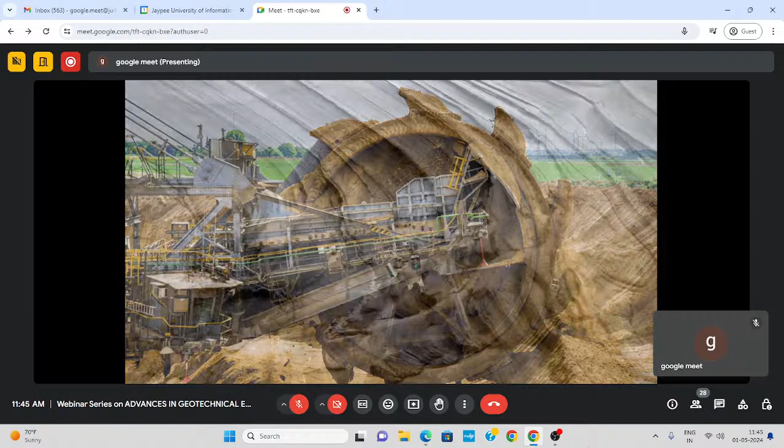The name Indian Geotechnical Society was adopted in 1970. The vision of the founding president, Mr. Khosla, and the honorary secretary, Dr. N.D. Gulati, was to build the society to promote cooperation amongst engineers and scientists for the advancement and dissemination of knowledge in the fields of soil mechanics, foundation engineering, soil dynamics, engineering geology, rock mechanics, snow and ice mechanics, and allied fields and their practical applications.

As the geotechnical community started to grow, the International Society decided to have regional conferences for each continent, along with having 4-yearly international conferences. This is when the first Asian Regional Conference was held in 1960 in New Delhi. India also hosted the 5th Asian Regional Conference at Bangalore in 1975 and the 13th one at Kolkata in 2007.

IGS has been organizing national conferences annually in different cities since 1961. The Silver Jubilee Conference was held at Kurukshetra in 1973. 1978's GeoCon was a landmark conference held at IIT Delhi, which was inaugurated by the then Prime Minister Morarji Desai.

IGS started the prestigious annual lecture in 1978, a tradition followed till date. The first one was delivered by Professor R.K. Katti. Several others who delivered the annual lectures include Professor Dinesh Mohan, Professor T. Ramamurthy, Dr. R.K. Bhandari, Professor Gopal Ranjan, Dr. B.G. Rao, Dr. N.V. Nayak, Professor G.V. Rao, Professor A.V. Shroff, and most recently, Professor M.N. Viladkar.

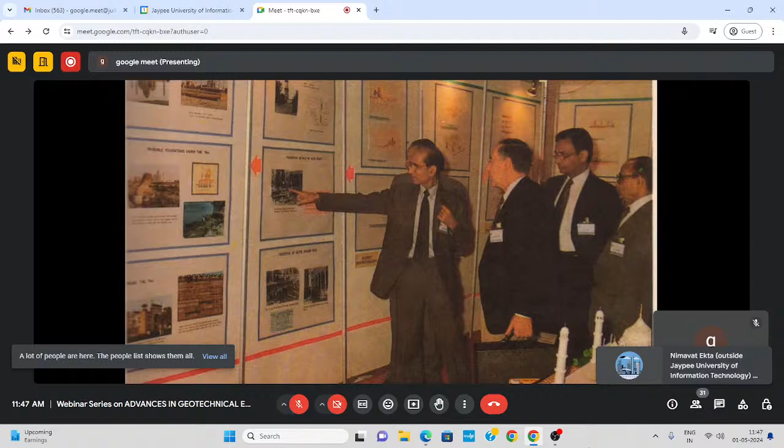IGS made an impressive debut in the international scene in 1994 with the organization of the 13th International Conference on Soil Mechanics and Foundation Engineering held in New Delhi. This was one of the biggest conferences in the history of the International Society, and it firmly put India on the international map.

24 years ago, in 1994, the Indian Geotechnical Society organized the 13th International Conference on Soil Mechanics and Foundation Engineering in New Delhi. This conference was a great success. Everything went perfectly as planned: its technical sessions, its exhibition, its field trips, its delegate interaction, its companions program, its entertainment, and hospitality.

Dr. Parry, the Secretary General of the International Society, in his concluding remarks, branded the conference as the Magic Carpet Conference. The turning point came from the 12th Asian Regional Conference in Singapore, which saw more than 20 Indian participants and the keynote lecture by Professor Madhav.

We were successful in winning the next ARC at Kolkata and also Professor Madhav's Vice Presidentship for Asia for the term 2005 to 2009.

The major visible contributions from Indian Geotechnical Society have been in the latest 21st century. A large contingent had attended the Singapore Asian Regional Conference, followed by election of Professor M.R. Madhav as the next Vice President for the term

With the growing demand for land, we have skyscrapers sprouting up in every big and small city in India. As industries grow, demand for power and power plants also increases. Connecting industries through bridges, highways, railways, and metros, the Indian geotechnical landscape only shows a promising future. This also means there is a demand for quality work as the margin for error is nil.

Today, IGS is working towards setting up a joint assessment for testing soils along with the National Accreditation Board for Laboratories, the NABL, to match the quality of testing with international standards. IGS is also working with the Bureau of Indian Standards to prepare Indian standard codes in several aspects of foundation design and field and laboratory testing. Many of our members serve on these committees.

The future is very bright and full of optimism. A number of initiatives have been taken up: promotion of student chapters in various colleges and institutes to sensitize students about the importance of geotechnical engineering in their curriculum and practice, creation of professional groups to make them aware of future challenges and opportunities in geotechnical engineering, and interactions with other professional groups overlapping with geotechnical practice.

It's hoped that with all these initiatives and further initiatives that one can have at the IGS level, there could be better geotechnics in the country, which ultimately leads to better, cleaner, sustainable societies.

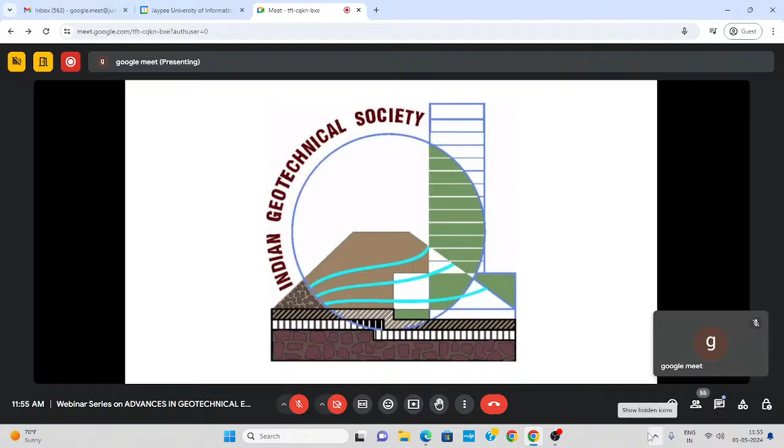Nestled among the mighty Himalayas stands a temple of education, an institution that shapes young minds of today into ambitious, conscientious, and dauntless individuals, individuals who will become leaders of tomorrow. This is Jaypee University of Information Technology, Solan, where education meets excellence.

Conceived as the joint vision of the Government of Himachal Pradesh and the founder chairman of Jaypee Group, Shri Jaiprakash Gaur, JUIT Solan is the first private university of Himachal Pradesh, established in 2002.

Over the last two decades, JUIT Solan has been relentlessly pursuing its mission of contributing to a better world by cultivating creativity and advancing fundamental knowledge through education among students. Adorning the picturesque slopes of Waknaghat hills in the Solan district of Himachal Pradesh, the university campus, spread across 25 acres, provides a peaceful and serene setting in the lap of nature for young minds to hone their skills for a brighter future.

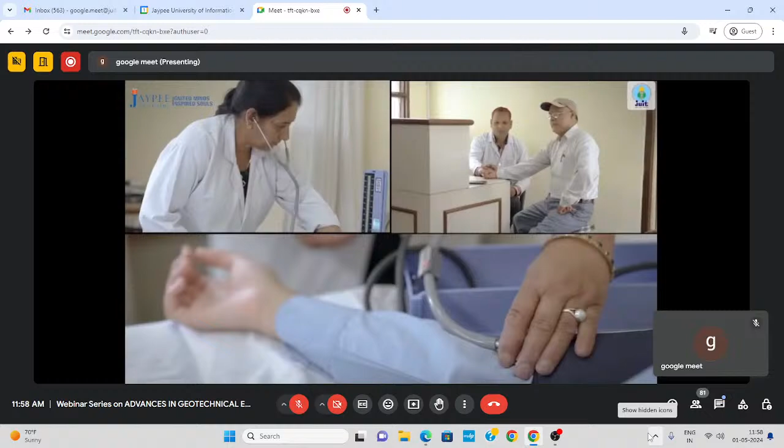The university campus makes life vibrant and enjoyable for students, both inside and outside the classroom. Handling 1900 students in the age group of 17 to 23 years is challenging. In JUIT, we create a conducive ecosystem for a student to develop and nurture his or her personality besides the academic curriculum, providing excellent amenities in the hostels, good nutritious food, and active sport fields.

Vibrant and diverse co-curricular activities, clubs, NCC, etc. are all domains which fall in my responsibility as the Dean of Student Welfare. The university exposes its students to placement teams from several well-known companies, and the students here do get placements in organizations like Microsoft and Amazon.

JUIT Solan stands tall as an institution committed to academic excellence, holistic development, and industry relevance. With its focus on research and innovation, as JUIT graduates step into the professional world, they carry with them not only knowledge but also the skills, values, and perspectives necessary to make a positive impact on society.

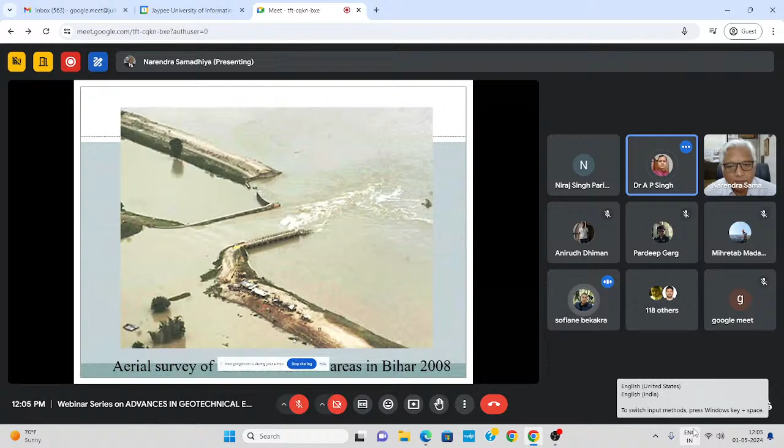Can you see this on the screen? No sir, not now. Now? Yes, it's okay now. It's visible now, sir. Okay. Slides are changing now? Yes, sir. Yes, yes, sir. Okay.

Very good afternoon to all of you. Today I am going to present a theoretical derivation, a lecture regarding the design of a rigid cutoff wall.

As far as the role of geotechnical engineering is concerned, it is to find out the passive earth pressure and active earth pressure. Since most of the audience are students, I'm sure that if you have passed third year soil mechanics and foundation engineering, this will be very useful for you, in the sense that the concept is very simple. With this concept, we can design the cutoff wall, rigid cutoff wall, which can be used for levees and for small earthen dams. This is actually the PhD work of Dr. A.P. Singh, who is Associate Professor, Department of Civil Engineering, NIT Jamshedpur. So I would like to acknowledge him before I start this lecture.

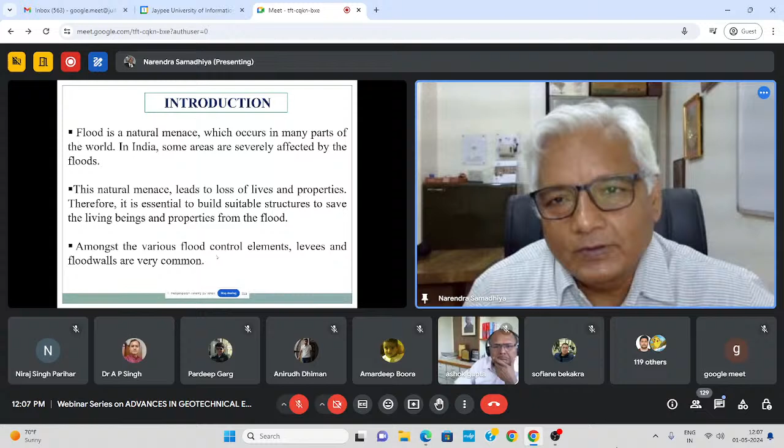Now, everybody knows about floods and how devastating they are. Especially in India, some areas are severely affected by floods, so it is a natural menace. It leads to the loss of lives and properties. So we will have to build suitable structures to safeguard property as well as life. Now, there are many flood control structures or elements available, and out of them, levees and flood walls are very common.

Most civilizations have been developed along water sources, whether lakes or rivers. But for a geotechnical engineer, whatever problems we face, mostly it is because of water.

Now I'm showing some photographs taken after floods. You will find these photographs on several websites. These are old photographs, an aerial survey of the flood-affected areas in Bihar in 2008. You will find similar ones, so many photographs available on the net.

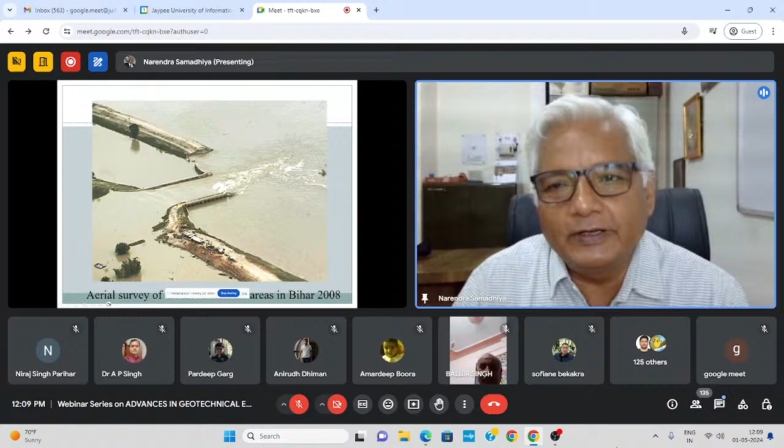Now here you can see this particular levee has failed, and because of the failure, water is entering into the property.

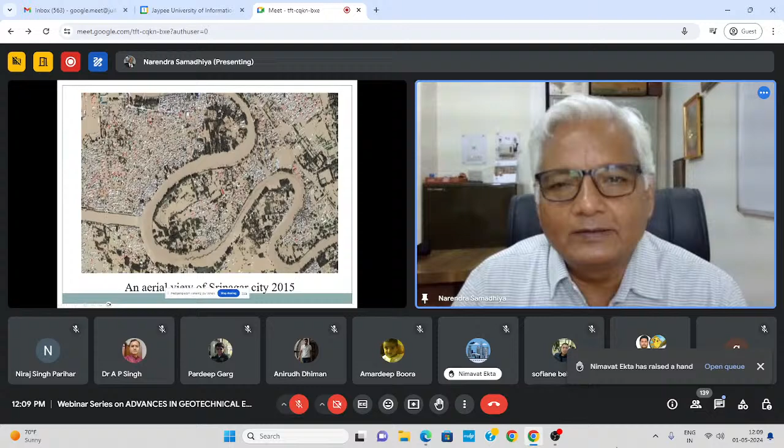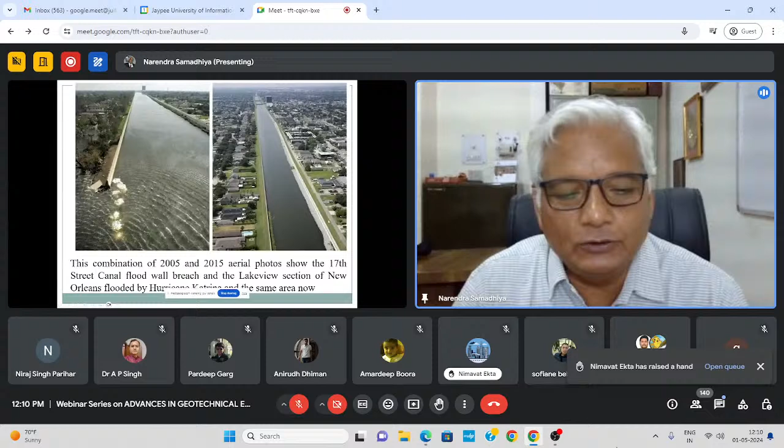Now this is the failure of a flood wall. Here you can see, because of the failure of this, this is from the 17th Street Canal flood wall breach and Lakeview section of New Orleans, flooded.

Now coming to the levees, these are the world's oldest hydro engineering structures. If you belong to Bihar, all along the Ganga plains you will find several levees constructed. Not only along Ganga, but other rivers also have them, and there are canal levees which are constructed too.

Now the purpose of these levees is to control floods and safeguard land, properties and living beings. Now these are also built to facilitate navigation, irrigation, recreation, and to prevent saltwater intrusion.

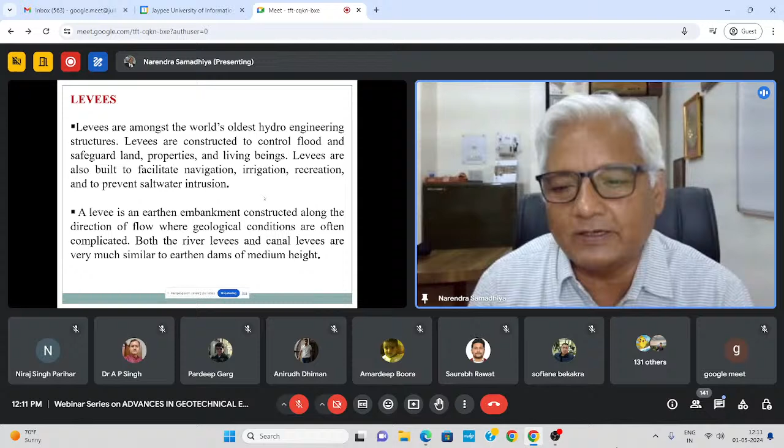Now it is a simple earthen embankment of small height. The height will depend on the width of that particular river or canal. So both river levees and canal levees are very much similar to earthen dams of medium height, nothing but simply the embankment.

So just to summarize, it is an earthen dike or embankment, used for flood control and constructed along the river. The purpose is to safeguard against water entering the property, the flowing water into the property.

Now as far as construction is concerned, it is similar to the construction we do for highway embankments. Material is placed in layers and compacted.

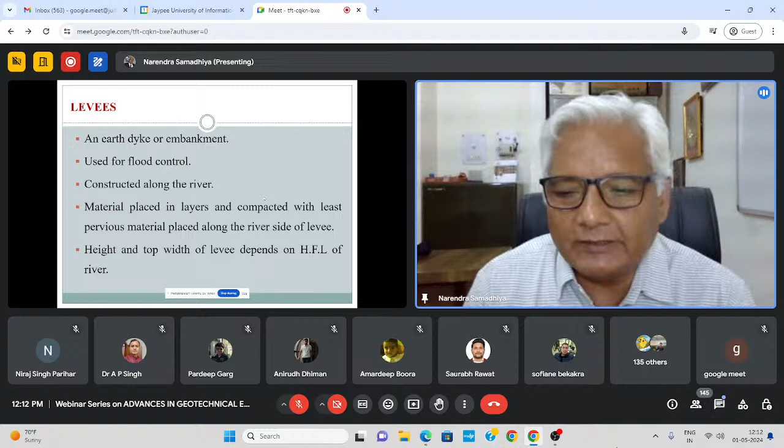And the height and top width of the levee depends on the highest flood level of the river, so we will have to keep a freeboard also, similar to a canal. So the levee cross section is adjusted to fit the site and available material.

Mostly it is constructed by whatever material is available at that particular area. Normally the top width is 3 meters, usually recommended, and the river side is protected by stone pitching.

So on one side, the river side, we place the pitching, and on the countryside it is protected by turfing. Now sometimes, in some cases, turfing is also not there on the countryside.

Now these run along the river bank with a margin of 2 meters between the toe of the levee and the top of the river bank. Sometimes it may run some distance away from the river, meaning these can be constructed very close to the river boundary line, or maybe away from there.

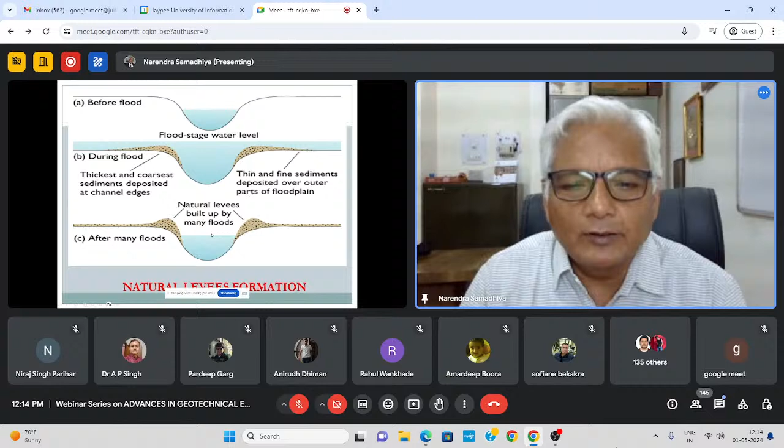Now sediment will be there in the water, and after the flood is over, initially the coarser particles will settle down, and after that you will find there is a formation of a natural embankment type of thing, and we call these levees. After many floods, you will find these levees are formed.

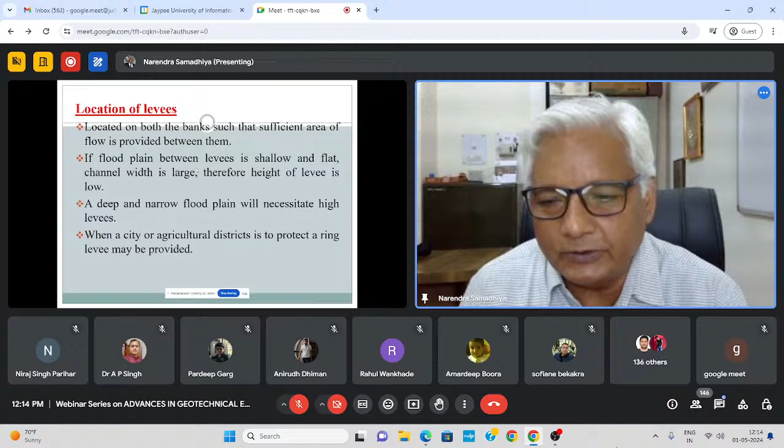Now these are located on both banks such that sufficient area of flow is provided between them. If the floodplain between levees is shallow and flat, the channel width will be large and therefore the height of the levee is low. But if you have a deep and narrow floodplain, that will necessitate high levees. So when a city or agricultural district is to be protected, a ring levee may also be provided.

Now, the failure of these levees results from the quicksand condition and piping in the foundation soil due to high seepage pressure, and this is highly dangerous in water retaining structures.

So there are remedial measures. The first approach involves reduction of the quantity of seepage, which may be achieved by providing anti-seepage elements of passive protection, like sheet pile wall, cut-off wall, slurry trench, clay ceiling, upstream impervious blanket, grout curtain, concrete wall, diaphragm wall, etc.

Whereas the second approach involves providing a safe outlet for seepage water which still enters the hydraulic structure or the foundation, and this may be achieved by providing anti-seepage elements of active protection, such as filters, drains, sand drains, stone columns, ditches, and relief wells.

So these levees are the passive one. I mean the cut-off walls are the passive one. Sheet pile cut-off wall is normally used. It is one of the common anti-seepage measures taken in water retaining structures, in dams, in reservoirs, in levees, flood walls, weirs, irrigation and power generation canals, etc.

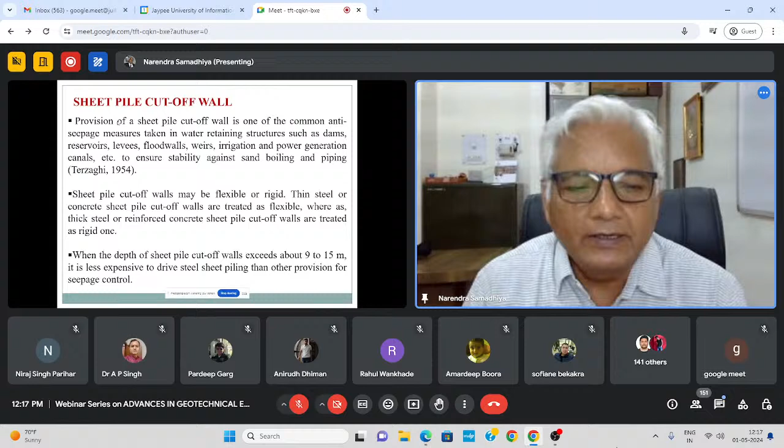Sheet pile cut-off wall may be flexible or rigid. Thin steel or concrete sheet pile cut-off walls are treated as flexible, whereas thick steel or reinforced concrete sheet pile cut-off walls are treated as rigid. When the depth of the sheet pile cut-off wall exceeds about 9 to 15 meters, it is less expensive to drive steel sheet piling than other provisions for seepage control.

As far as the design is concerned, all these cut-off walls have been, and are being, designed on the basis of the analysis given by Terzaghi in 1954. Terzaghi suggested a graphical method for computation of the active earth pressure, flow net for the determination of water pressure on the upstream and downstream side, and an analytical method for the passive earth pressure.

So what we will have to do is simply draw the flow net, and from the flow net we can find out the water pressure which will be acting on the upstream side. They have also suggested analytical methods for passive earth pressure determination.

Now, this particular method given by Terzaghi pertains to a retaining wall with a vertical drainage layer acting as the surface of seepage. It is not necessary to compute the seepage force acting on the failure wedge separately. So Terzaghi has not recommended or used the actual seepage force which will be acting on the failure wedge adjacent to the cut-off wall.

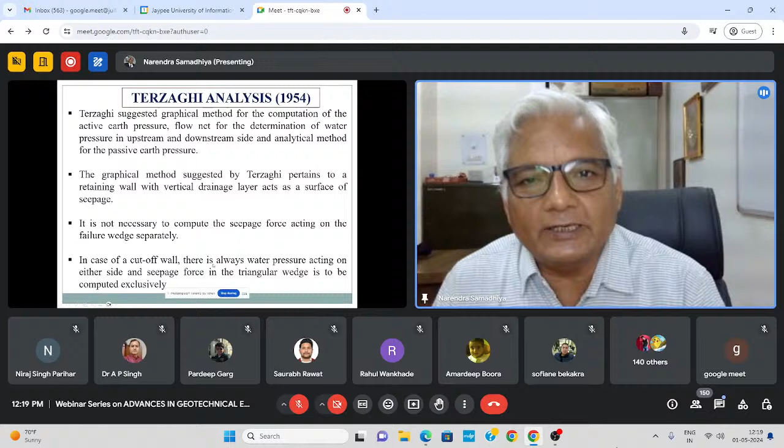Whereas Terzaghi has not considered the seepage force directly, they have considered it indirectly. What they have done is consider the submerged unit weight of the soil, reduced by the average seepage pressure per unit volume of the mass of soil, and that is used as the unit weight of soil for computation of the passive earth pressure.

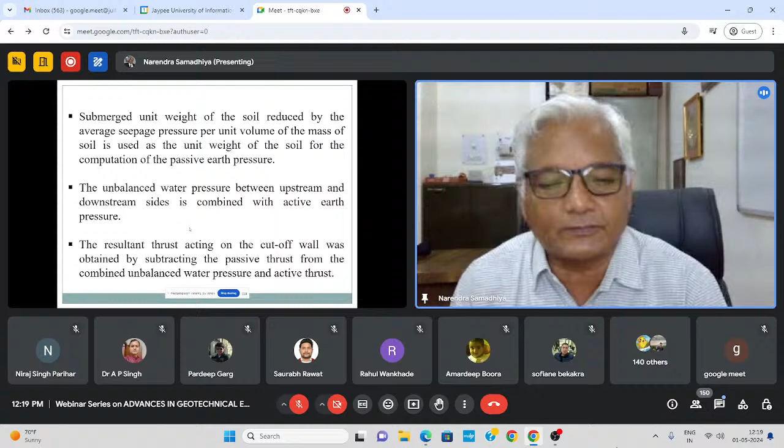The unbalanced water pressure between the upstream and downstream side is combined with the active earth pressure. The resultant thrust acting on the cut-off wall was obtained by subtracting the passive thrust from the combined unbalanced water pressure and active thrust.

So there are critical gaps, and those are the magnitude and direction of seepage force changing with the volume of the critical soil wedge. You know that the seepage force acts in the direction of flow, and hence its magnitude and direction depend on the flow net. When you draw the flow net, you know the direction of the flow line, and you can find out the direction of the seepage force acting on that particular mass which is considered.

So the seepage force is likely to change the angle of the failure plane of the soil wedge also. Normally in the analysis we assume that the failure wedge is inclined at an angle of 45 plus phi by 2, if you are going for Rankine theory. But if you consider the seepage force, that will change the angle of the failure plane also. So the computation of active and passive thrust and their angle of failure plane without considering the actual seepage force is not justified, and it needs verification.

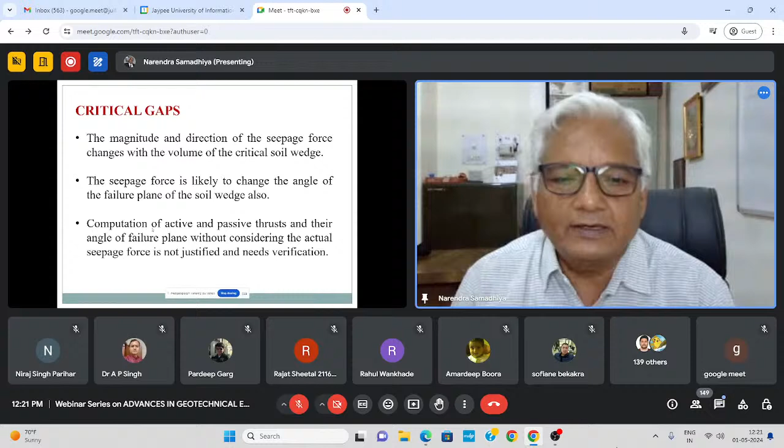And that's what has been done by us in this particular study.

So the proposed method is the seepage force acting on the soil wedge is calculated accurately in both upstream and downstream soils. The magnitude and direction of seepage force changes with the volume of the critical soil wedge, and the seepage force is likely to change the angle of the failure plane of the soil wedge also.

So the active and passive thrust acting on a rigid cutoff wall have been quantified by considering limiting equilibrium of forces, including the exact seepage force acting on a triangular failure wedge.

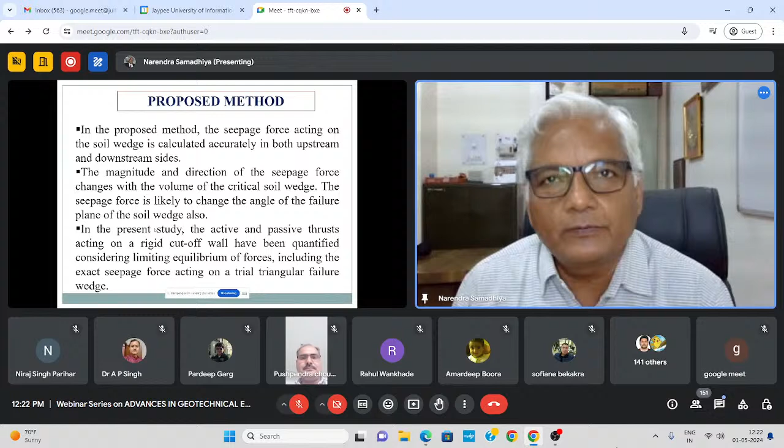Now, an equipotential function and pore water pressure in the flow domain are obtained through conformal mapping. I will not be going into the details of this. If you want, you can. I will give you a paper, and you can read it from that paper.

And we have referred to this book by M.E. Harr, a very good book, especially for seepage.

And the exact seepage force has been determined both graphically and analytically using the boundary pressure method, which is given by Cedergren. Or otherwise, also what you can do, if you have the flow net, you can find out the pore water pressure, or the pressure head, at different locations along the height of the wall, and then you can find out the seepage, the water force which will be acting on the wall.

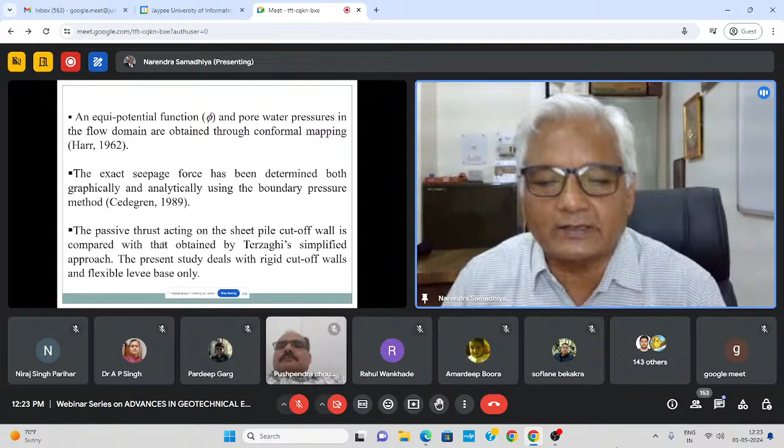And the passive thrust acting on the sheet pile cutoff wall is compared with that obtained by Terzaghi's simplified approach. And the present study deals with rigid cutoff walls with flexible base only.

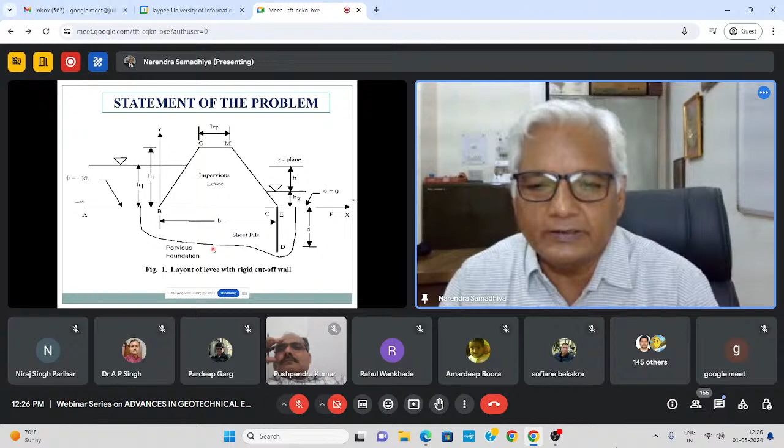So there are various possibilities, like when the failure plane intersects the downstream slope. So if you consider a failure plane from here, you can have a failure plane like this, or a failure plane can be like this, or like this. So it can be a case where the failure plane intersects the downstream slope, or when the failure plane intersects the crest of the levee, or when the failure plane intersects upstream. Only thing is the weight of the soil mass involved will change, and the remaining things will stay the same.

So here this is the case of a levee. This is the top width, and you can see here that this is the angle theta, the angle of the failure plane, and this is the failure plane which is intersecting the downstream slope. So here what you will have to do is simply determine the weight of the different components.

So here, I am considering this triangle EDI. So weight of this soil in the foundation, along with a force, this is the seepage force which will be acting at an angle alpha, right? So this weight W1. Now this is the embankment, and we are not considering seepage taking place through this because we are considering this as impervious.

So here this is the weight W2 and W3. W2 plus W3 is the weight of this particular levee, whereas W1 is the weight which is, and then on this particular failure plane, you will be having the normal force, and then the cohesive resistance in the foundation, cohesive resistance in the levee, and similarly the frictional resistance. So you can calculate this T1, T2, etc., and then you can find out the active earth pressure.

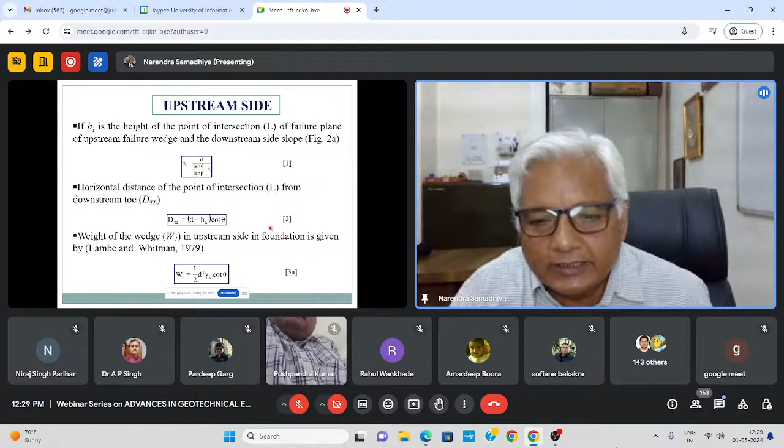Now when the failure plane intersects the downstream slope, what will happen when it is intersecting the downstream slope? So this is the angle. Different components you can calculate.

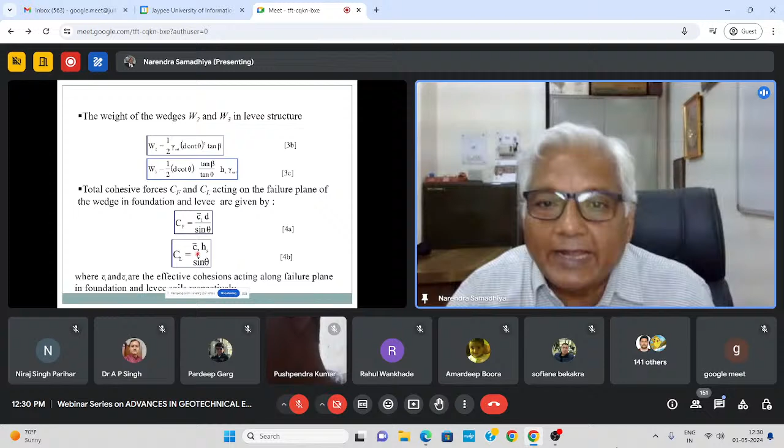You can calculate W2, you can calculate W3, and also the cohesive forces which will be acting on that particular portion of the failure plane which is in the foundation and which is in the levee. So from that you can also calculate the cohesive force in the foundation and cohesive force in the levee. The C1 and C2 may be different, and actually these will be different because one is in the foundation soil and another is the levee embankment material.

Then we can also find out the T1 and T2 forces by simply resolving the forces in the direction tangential to the plane and perpendicular to the plane. So here N1 and N2 are the normal components acting on the plane, and then T1 and T2 will simply equal N1 tan of phi 1 bar and N2 tan of phi 2 bar. N1 bar and N2 bar are the normal forces acting on the failure plane, and phi 1 bar and phi 2 bar are the effective angle of internal friction of the foundation and levee soil.

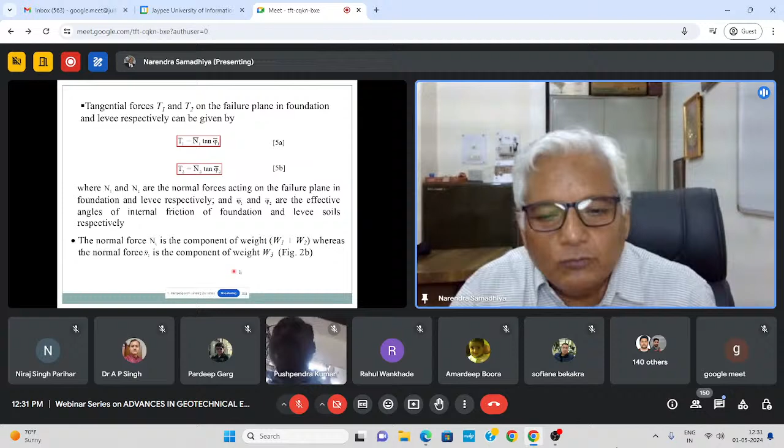And then we can also find out the normal force that will be the component of W1 plus W2 in the foundation portion, and N2 bar will be the component of weight in the levee portion. Then the normal forces and reaction can be obtained by considering limiting equilibrium of the wedge, summation of all forces in the vertical direction to be equal to 0, and summation of all forces in the horizontal direction to be equal to 0. So simply by considering those forces, now we can find out N1, N2.

Now, if we are considering the foundation soil or the levee to be cohesionless, then in place of that we can assume C to be 0. But normally, we can consider cohesion and friction both.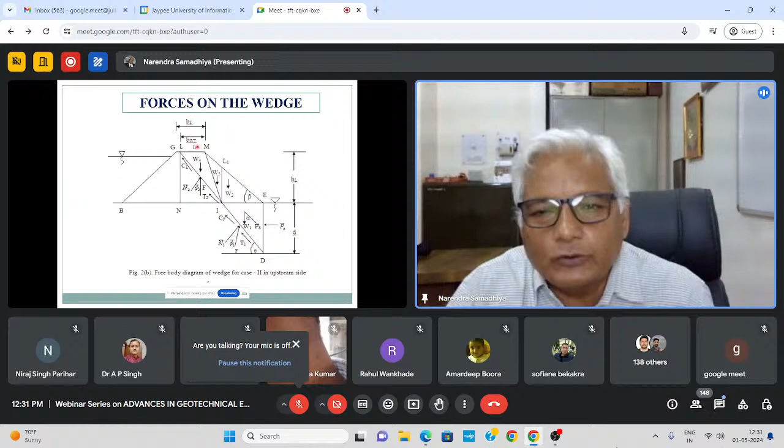Now the third case is when the failure plane intersects the crest of the levee. Here you have these different components, so you keep on adding these weights. If it is intersecting the downstream slope, you will have W1, W2. If it is intersecting the crest of the slope, it will also have W3. If you are considering it in the upstream, then you can have that too.

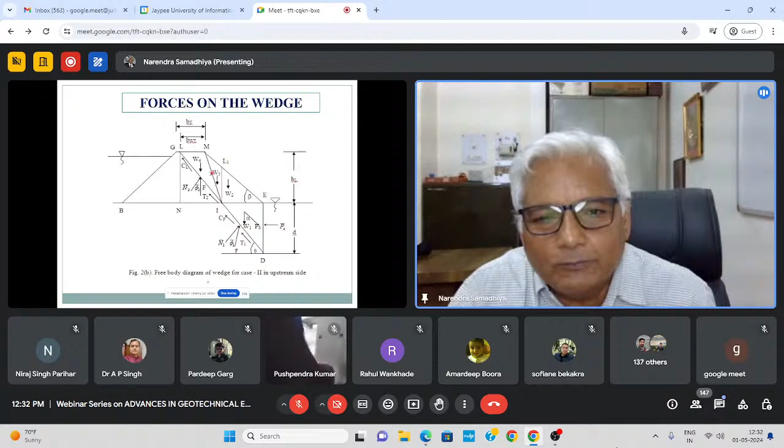By simple trigonometry, we can calculate W1, W2, W3, W4, and also we can calculate CL, that will be equal to cohesion multiplied by this length from here to here, and CF, that is the cohesion multiplied by this. Then you can resolve the forces, and you can also find out N1, N2, etc.

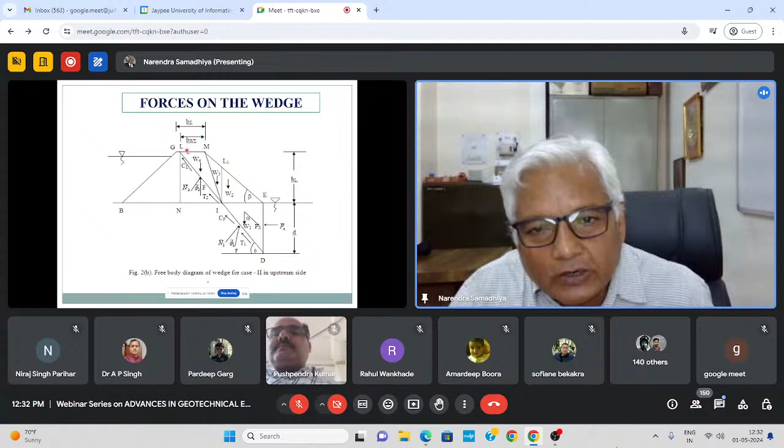And then if you consider this block and these two blocks, then you can also find out this force R. So the free body diagram of wedge W3 and wedge W1, W2 combined gives the force at face L1I in the upstream side. Now, if DTL computed from the equation is greater than HL upon tan beta and less than this, then the weight of the wedge W1, W2 will be the same as obtained from these equations. Otherwise, from the trigonometry, you will have to simply determine these weights.

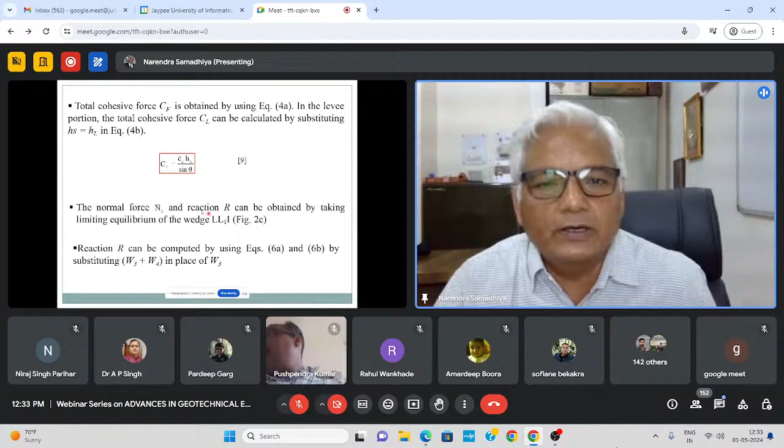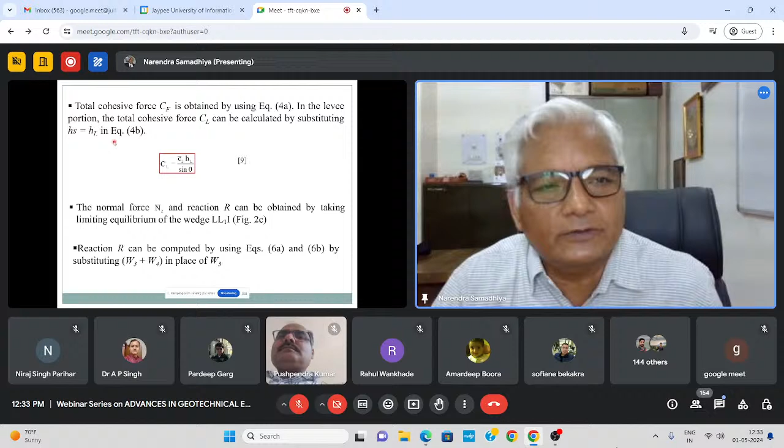You will have to simply determine these weights, W1, W2, W3, and if required, W4 also. By simple trigonometry, you can find out these. Then the total cohesive force is obtained by using this particular equation. In the levee portion, the total cohesive force CL can be calculated by substituting HS equals HL, so CL can also be determined. And the normal force, by limiting equilibrium, and reaction R can be computed.

Now, when the failure plane intersects the upstream slope, you will have to calculate this W3, W4, and if required W5 also. Whatever number of wedges you consider, then you can calculate. So from trigonometry, we can find out this W3, W4, W5.

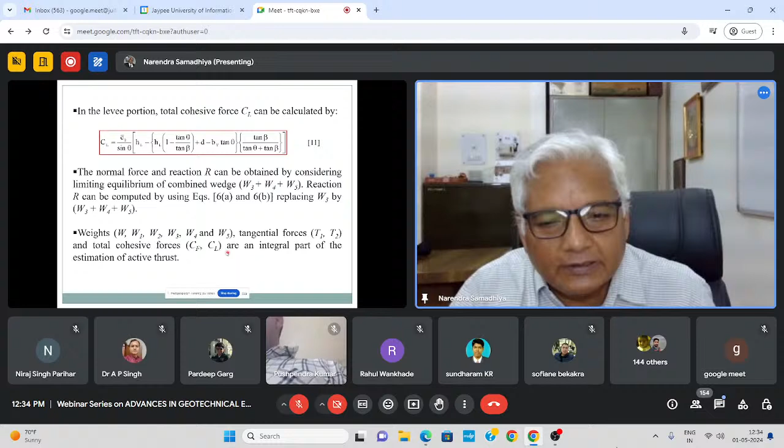So after obtaining all these parameters, we will have to go for the seepage analysis, and from the seepage analysis, we will have to determine the seepage force. So all these forces are determined, all the weights, all the forces. Then on the downstream side, weight of the wedge and total cohesive force in downstream side are obtained by using this.

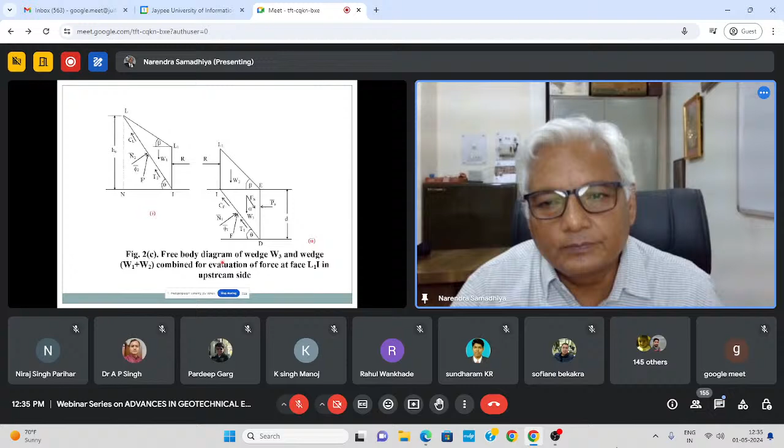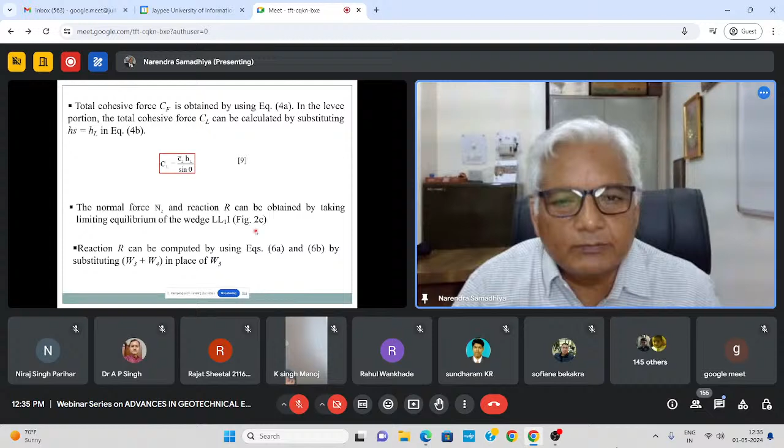So, weight of the wedge and the total cohesive force in the downstream side are obtained by trigonometry, and then you can find out the total tangential force, that will simply be equal to N tan phi 1 bar. So these forces are integral part of the estimation of the passive thrust.

And the seepage force, it is the magnitude and direction of seepage force, these are calculated by the boundary pressure method, which is used by Sutherland. And if you are going for the Terzaghi approach, they have determined this passive thrust in the downstream side of the cutoff wall, which can be estimated by considering this in place of gamma dash. They have considered this as gamma double dash, which is nothing but the submerged unit weight of the soil, reduced by the average seepage pressure per unit volume. So they have determined the seepage pressure, divided it by per unit volume, and included that.

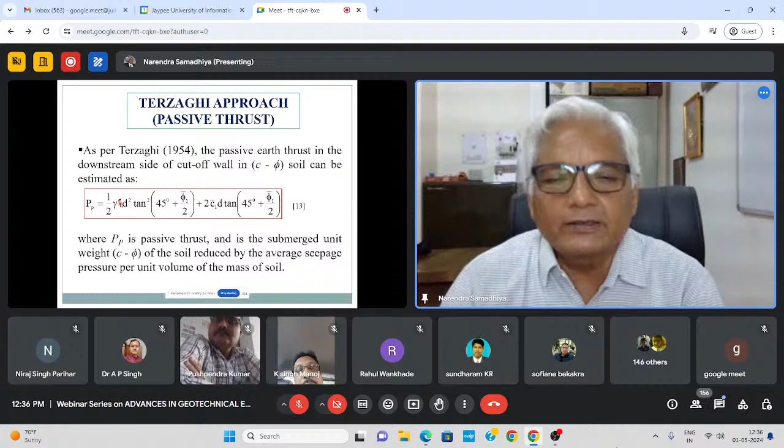So our approach is that we should actually determine the seepage force, and then the passive thrust should also be calculated using that particular seepage force. That is the main difference between Terzaghi and the analysis which is presented here.

So in the proposed approach, a trial soil wedge in the upstream side of the rigid cutoff wall is considered as a free body diagram. All forces acting on the wedge are calculated. If you know the geometry, area multiplied by unit weight multiplied by unity will give you the weight. So all those weights from W1 to W5 can be calculated.

And then the seepage force is superimposed over the soil wedge, where forces are to be analyzed for equilibrium condition. So incorporating all the forces in the horizontal and vertical direction for c-phi soil, then using the limiting equilibrium.

Now, resolving all the forces in the vertical direction and all the forces in the horizontal direction, you will get these equations in which that seepage force, which is inclined at an angle alpha with the vertical, that will also have to be taken into account. That is the only difference from the Terzaghi theory. So this active earth pressure may be calculated by solving these equations. This active earth pressure is coming into picture here.

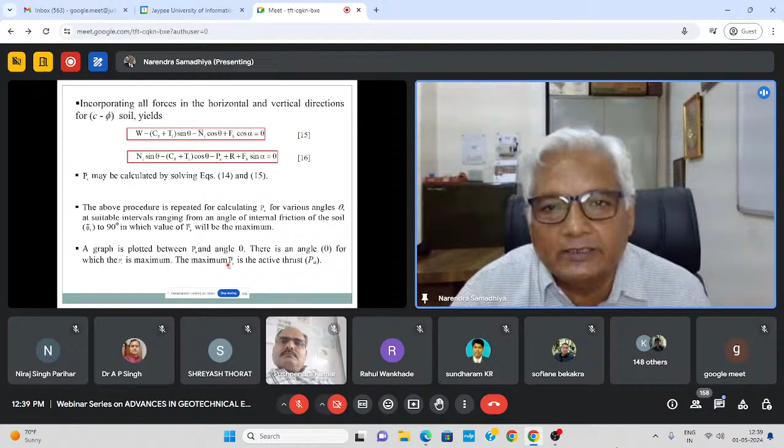So here, in order to determine the passive thrust, the same procedure is used. In the active case, the direction of seepage force will be in this particular direction, whereas in the passive case, because the flow line will be like this, here it will be in the opposite direction.

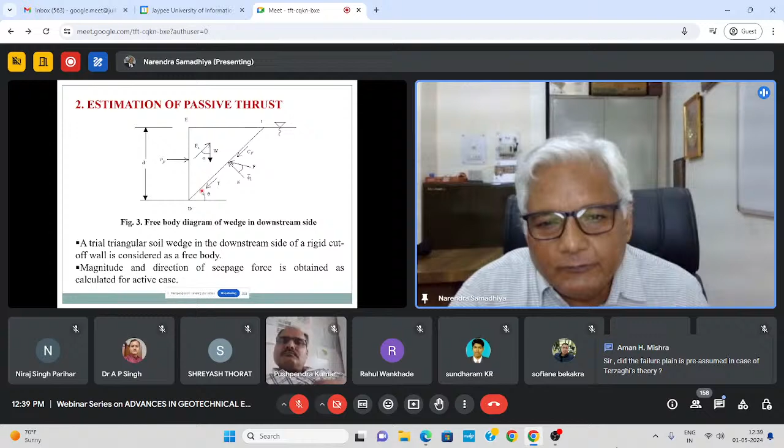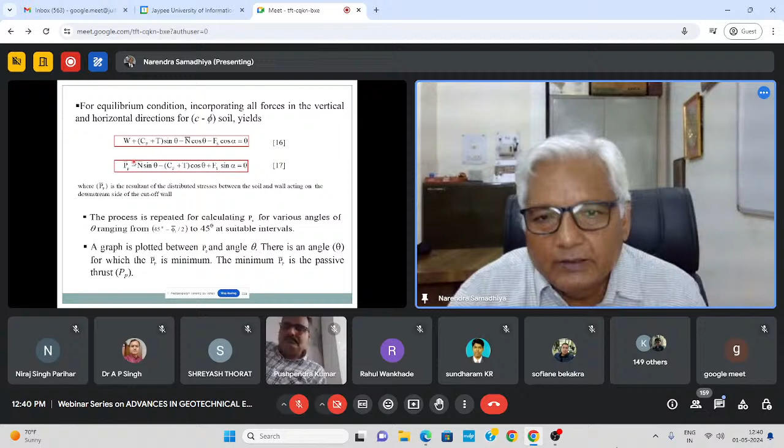Similarly, considering the free body diagram of this particular wedge, we can also find out PP bar. In order to find this, we vary theta, and then using the equations, we can calculate PP bar here. This is done using two equilibrium equations: summation of F V equal to 0 and summation of F H equal to 0.

PP bar is the resultant of the distributed stresses between the soil and wall acting on the downstream side of the cutoff wall. The process is repeated for various values of theta, ranging between 45 minus phi by 2 to 45 degrees. A graph is plotted, and whichever angle theta gives the minimum value, that minimum will be PP bar, the passive thrust.

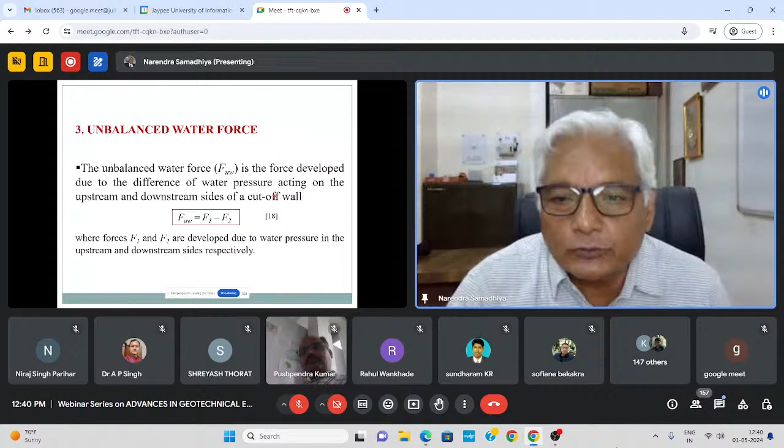Then we also find out the unbalanced water force. The unbalanced water force is the force developed due to the difference in water pressure acting on the wall on the upstream and downstream sides. So we draw the free body diagram of the cutoff wall.

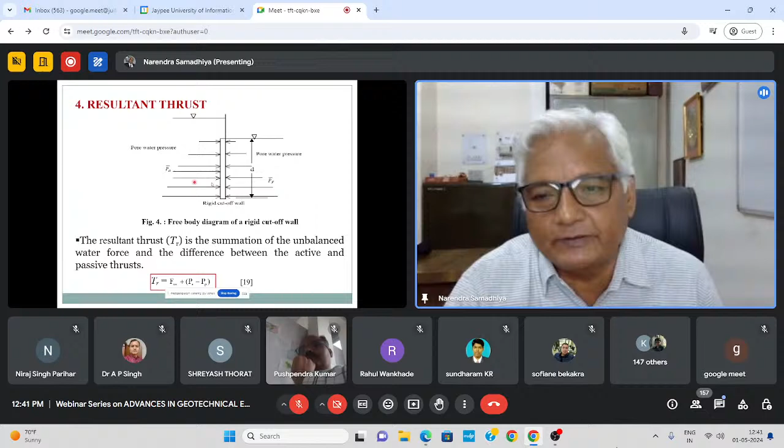Here is the free body diagram of the cutoff wall. On one side it is active earth pressure, on the other side it is passive earth pressure, and also water pressure acting on this side and that side. So the unbalanced will be the water pressure difference between these two sides. The resultant thrust is the summation of the unbalanced water force and the difference between active and passive thrust, so we will have to determine this unbalanced water force.

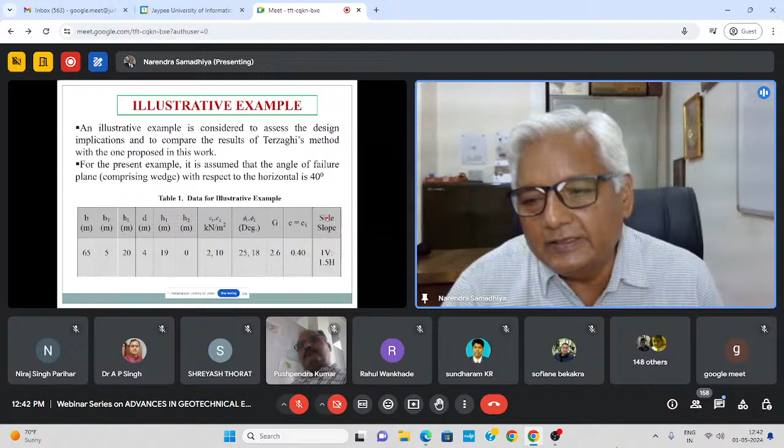Now, one illustrative example is considered to assess the design implications and compare the results of Terzaghi's method with the one proposed in this work. For the present case, it is assumed that the angle of the failure plane comprising the wedge with respect to horizontal is 40 degrees. So width, BT, HL, depth of the cutoff wall, head water, height of the water column on the upstream and downstream side, different strength parameters, and the side slope of 1 vertical to 1.5 horizontal are given.

Then the equipotential function and pore water pressure distribution in the flow domain under a levee with a sheet pile cutoff wall resting on pervious foundation of infinite depth have been obtained for the given data at all boundaries through conformal mapping. I am not discussing that conformal mapping technique here, but conformal mapping has been used. You can also determine this by simply drawing the flow net, finding the pore water pressure at different points.

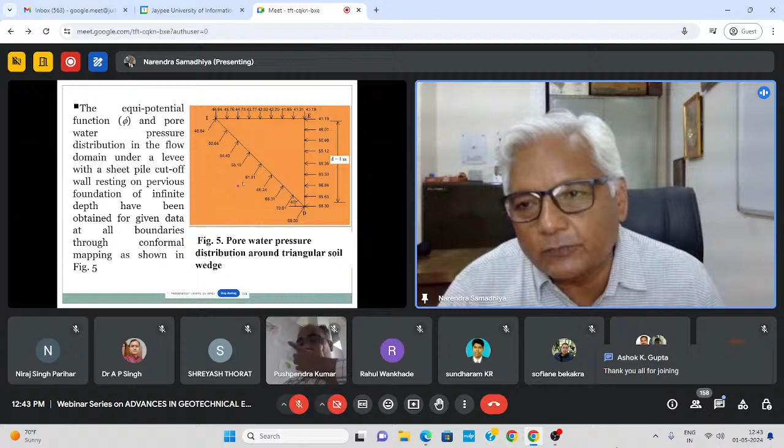In this particular case, this is the triangular wedge on the upstream side, and at different points these forces are determined all along the boundary, and finally the unbalanced water force is determined. This is the total force acting on this side, and from here we can find the total force acting on this side. These are the total forces, and this is the weight of the soil mass, which is downward.

Then we draw the force polygon for this: this force acting vertically, another force, this force here, this force here. Whatever is unbalanced, that is the seepage force, comes out to be 14.4 kilonewton.

The procedure is very simple: on this wedge, you find the water force acting all along this line, find its resultant, which will be normal to this, find the resultant here and here, and then draw the force polygon to find the unbalanced seepage force.

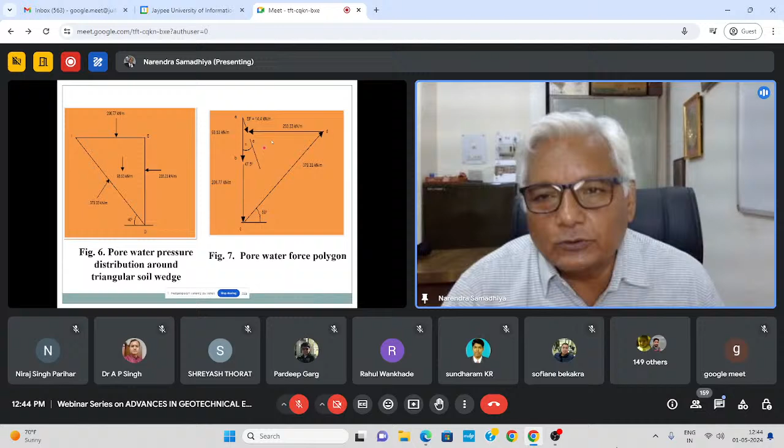Then, in order to find the active earth pressure using those equations, for different angles you simply find the active earth pressure and plot it. Whichever is maximum gives you the active earth pressure acting on the upstream side of the cutoff wall.

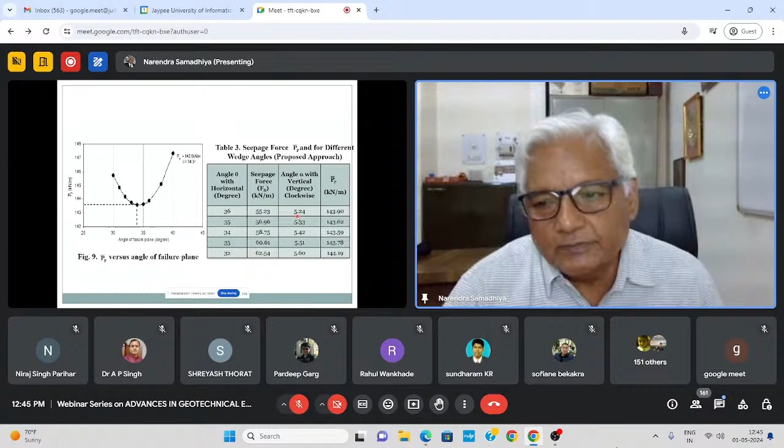These calculations are given here in tabular form. Similarly, to find the passive earth pressure on the downstream side of the cutoff wall, whatever angle gives the minimum value will be PP. These calculations are also given here. From this, you can find there is a difference of about 17 kilonewton per meter length in the passive thrust obtained from both approaches, that is the Terzaghi approach and the proposed method.

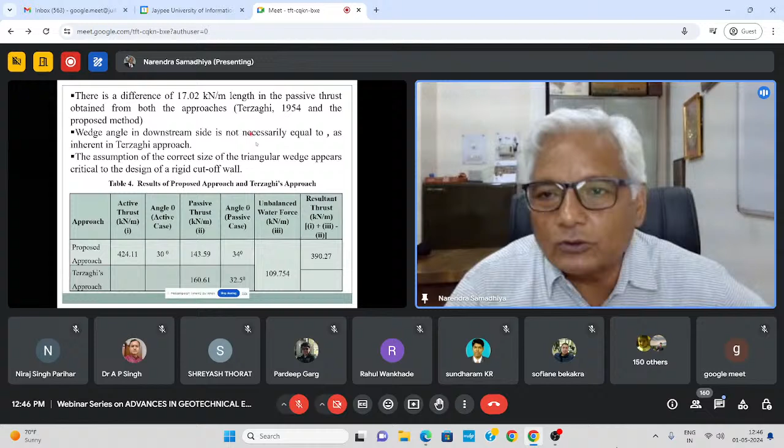The wedge angle on the downstream side is not necessarily equal to 45 minus phi/2 as inherent in the Terzaghi approach. So the assumption of the correct size of the triangular wedge appears critical to the design of a cutoff wall. We will have to determine the correct passive thrust, including the seepage force, and also the angle of the failure wedge, including the seepage force.

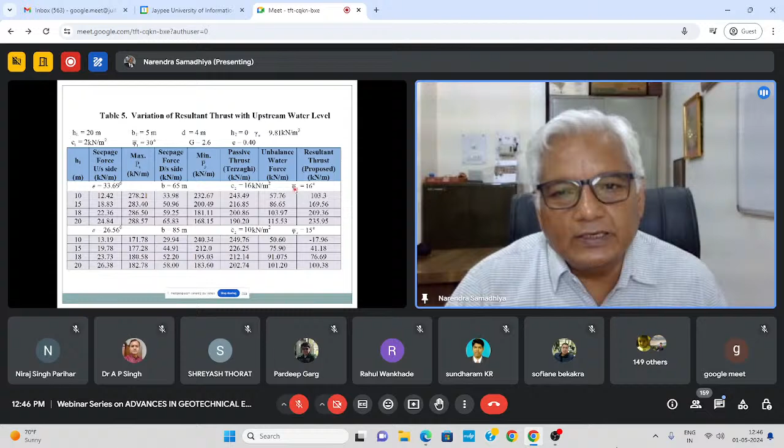So those have been determined. Then the resultant thrust obtained by the proposed approach with upstream waterhead for c-phi soil foundation has also been calculated. That is given in the next table, where earlier c and phi were not considered, but here c and phi are considered. Also the resultant seepage force and the unbalanced water pressure, water force, have been calculated. The procedure is very simple.

You simply consider that wedge, and whatever theoretical background you have, whether you go for conformal mapping, or whether you simply draw the flow net to find out the water pressure. You know how to find out the water pressure if you have got the flow net.

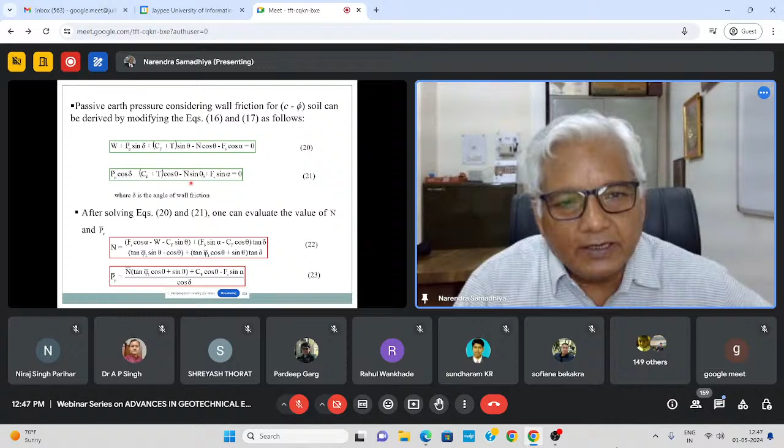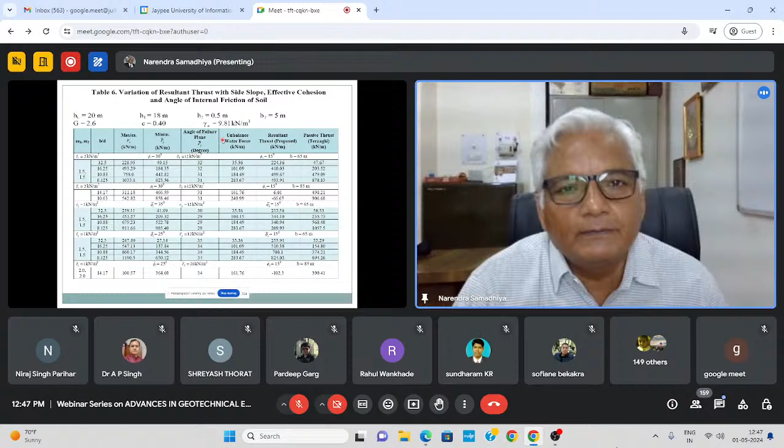Now it can be seen from these tables that for a cutoff wall of 4 meter length, for a small angle of wall friction, say delta less than phi/3, the passive earth pressure is increased by 9%. Whereas if you go for wall friction greater than phi/3, then it increases by 26%.

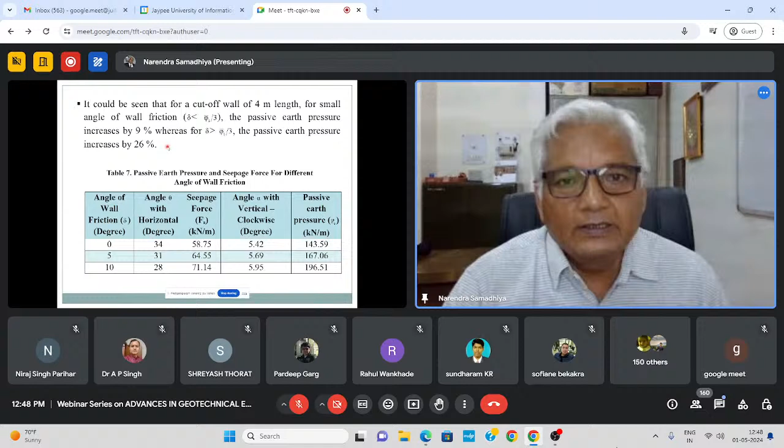Now, if you are not considering this particular seepage force, then you will be underestimating the force which is acting on the cutoff wall, and the cutoff wall will be designed on the basis of those forces. So that design of the cutoff wall may be erroneous.

So for cohesionless soil, N bar and PP bar can be calculated for different values of delta, considering the wall friction, with the angle of internal friction of the foundation soil taken as 25 degrees.

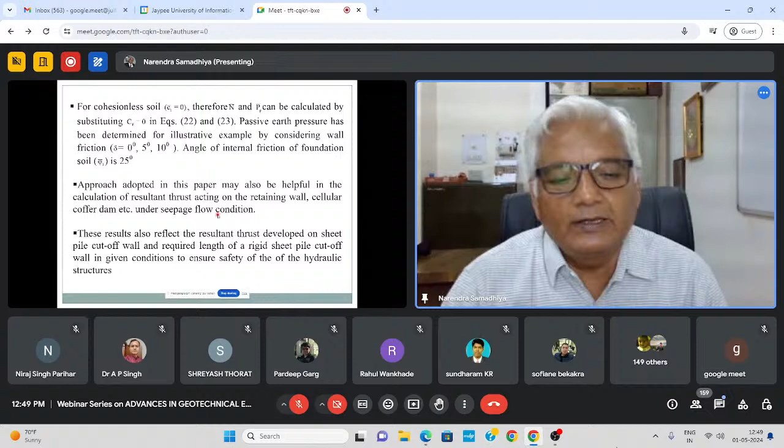So the approach adopted in this paper may also be helpful in the calculation of resultant thrust acting on retaining walls, cellular cofferdams, under seepage flow conditions. These results also reflect the resultant thrust developed on sheet pile cutoff walls and the required length of the rigid cutoff wall in given conditions to save hydraulic structures.

So finally, to conclude, the influence of exact seepage force on active and passive thrust can be very significant. We have seen that the active and passive thrust must be calculated by solving the equilibrium of forces only after superimposing the seepage force on the soil wedge.

The effect of seepage force on the failure wedge has also been found to be considerable in both cases of active and passive thrust. On the downstream side, the difference in angle of failure plane as compared to the Terzaghi method is significant. So the proposed study may be very useful in determination of seepage force and its influence on active thrust, passive thrust, and resultant thrust, which is required for the design of cutoff walls.